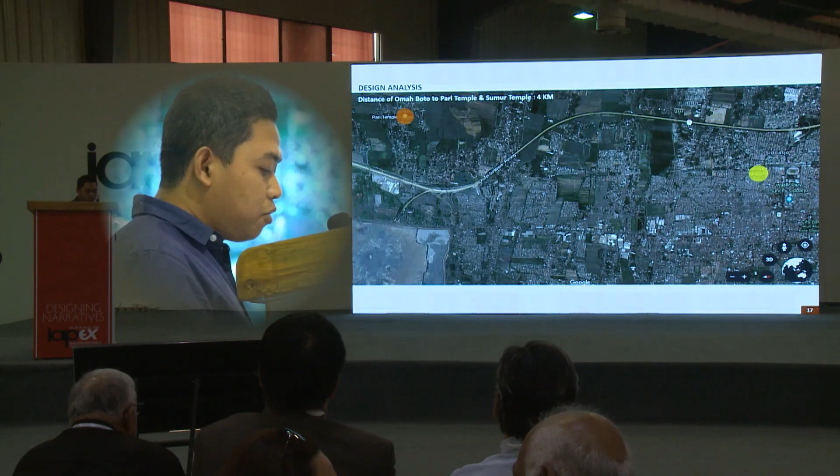Omah Boto is located in Sidoarjo, and in our analysis we found something interesting. The project location is close to Pari Temple and Sumur Temple, which have very interesting brick tectonics.

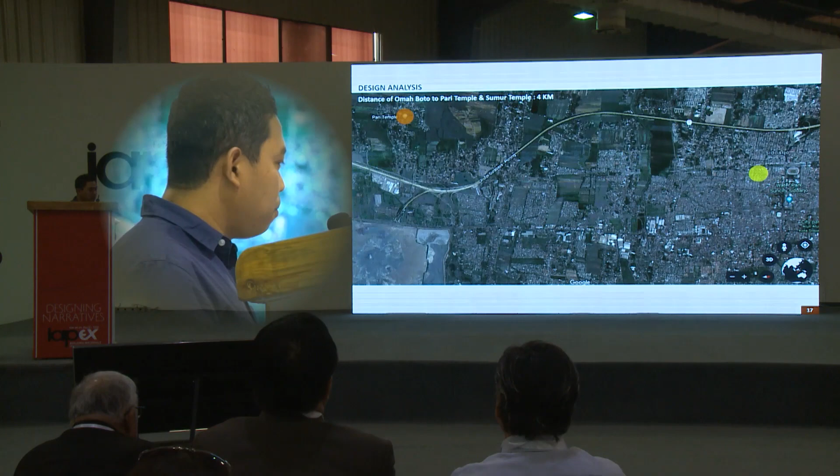These temples are located nearby and were built in the 14th century, about 4 kilometers from Omah Boto. This is Pari Temple and Sumur Temple, which were built 700 years ago.

Regarding this brick, we can see that Omah Boto, Pari Temple, Sumur Temple, and Trowulan are in line, just 20 kilometers from the site.

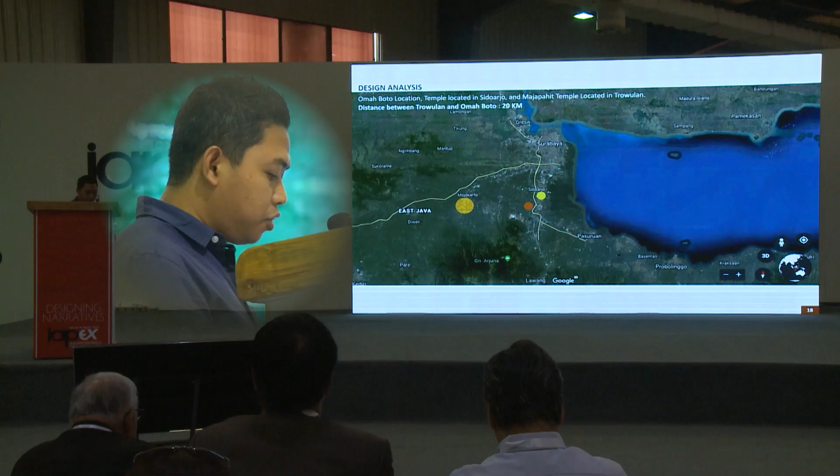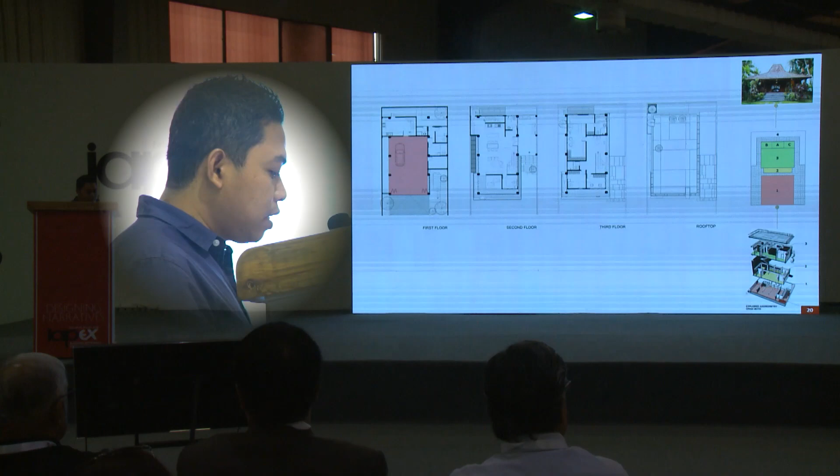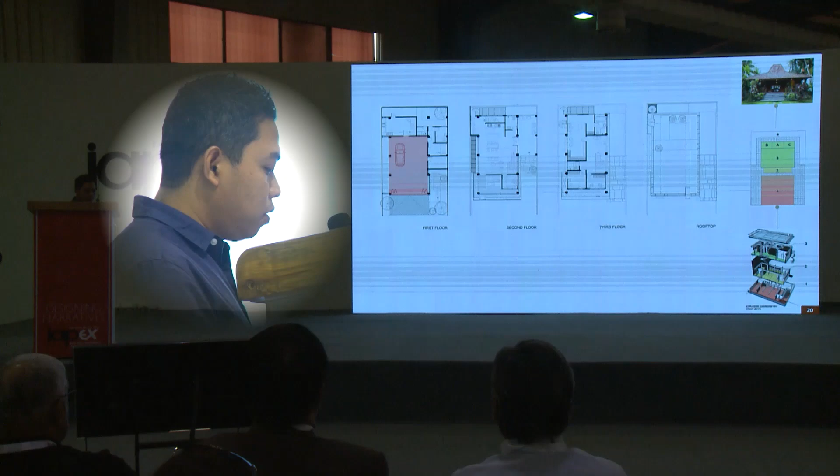We tried to vertically translate the connection between spaces, considering a wider communal space, more open and accessible from the lower level, followed by semi-private space on the second floor, and private rooms on the third floor. We know that sharing activity is the Javanese philosophy.

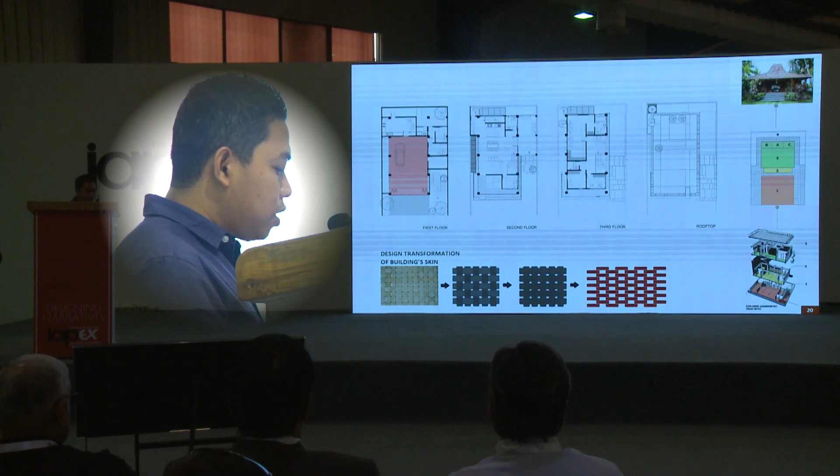This skin of the building was transformed from the Javanese house wall. It's called gedek, or woven bamboo, and we implemented it in brick.

This is the genesis of how Omah Boto was made. Local red brick becomes the DNA of the whole house.

The module of a brick determines all of the house elements' dimensions, even the doors, windows, height of space, fence, and others. This is the reason why it's called Omah Boto, or brick house.

We use MRH brick, this local brick named after the nickname of a machine brick producer's wife. The name is Mufaroka. So this MRH has a story too.

These are the 13 brick tectonics applied in Omah Boto, inspired by Pari Temple and Sumur Temple. This is the detailed drawing given to the craftsmen to help the arrangement process, how we communicate with them. They understand the picture easily by looking at the color code like this.

This is it, we give it the name decoding. And this is the result.

The tectonics concept and the craftsman's brilliance can bring architects' and clients' dreams come true. Exposed brick originality creates a new, unique view from each side of the wall, ceiling, and floor.

If we take a look at the key plan, this is where the 13 tectonics were applied in Omah Boto.

The uniqueness of the brick arrangement also embodies some of Indonesia's batik patterns. This is the owner's desire to make his house have a strong Indonesian character.

So we added all the elements to support the Javanese architecture's character. It is gebyok door, the Javanese carved wooden door, used as the main door of the house. It was able to let wind and light get into the house.

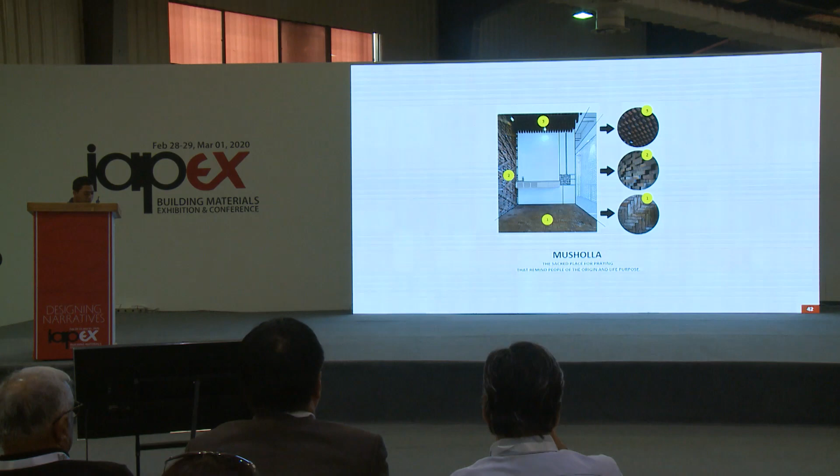The musola, or praying room, is a sacred and holy place. This room's concept reminds people of the origin of human creation by Allah. Human is created from soil, so is the brick. So the musola is surrounded by bricks in the floor, wall, and ceiling.

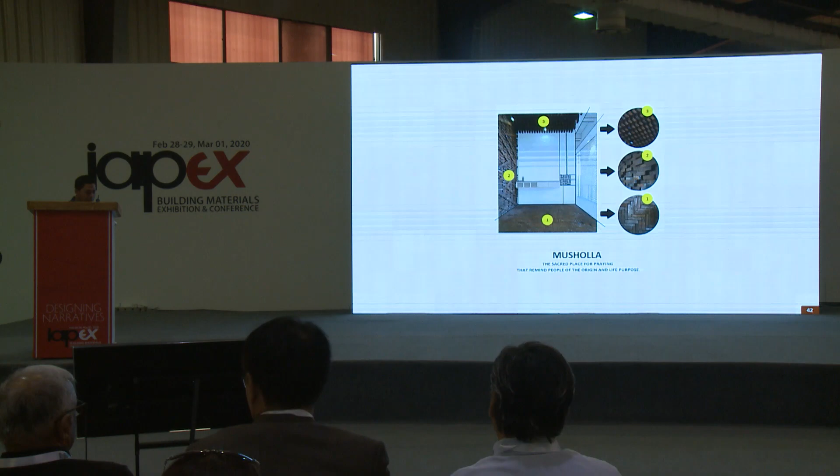When we kneel, we look at soil. When we sit tahiyat, we look at soil. And when we pray, we look at soil. It increases the reminder about our origin.

This is the application result. It reminds us back to the source of life. Our main life purpose is to serve God. The floor, wall, and ceiling in this room are made of bricks as representation of our origin.

This backdrop was made out of residual bricks, so none of it went to waste. From this building process, there were 10% brick waste, and that 10% was arranged into the tectonic design, and the result became the main point of view of this communal space. So this is the garage, but at other times it becomes a communal space.

After finishing the Omah Boto project, I tried to evaluate and contemplate myself, and this is my self-reflection. I realized that red brick has issues with destroying our earth in its making process, because it can damage the soil surface and causes carbon footprint. But from the deepest of my heart, I'm trying to preserve this type of brick that has existed since the 14th century, because if we don't preserve it, the local brick producers will disappear.

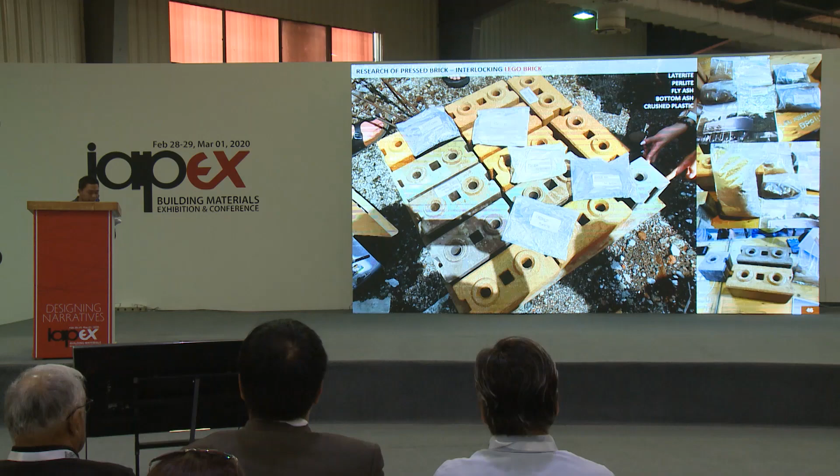Now, we don't just make bricks from laterite soil. We have collaborated with a brick company, my professor, and colleagues to do research and make pressed brick that uses waste material, such as perlite from air conditioner waste parts, fly ash and bottom ash, even crushed plastic and animal waste. This we call Lego brick, the interlocking system brick.

Why do we use the interlocking system? It was inspired by the interlocking systems we found in Indonesian stone temples, like Borobudur and Prambanan, and how they joined materials even without any adhesive. Now we can apply it to our new project, Al-Fatah Mosque in Sidoarjo, East Java, and we still use the ingenuity of craftsmanship.

This is the result. The craftsmen read the code drawing from the architect and learn a new thing, new material, new technique.

In this mosque building process, we always try to share and learn together with young architects and students. He is Golfa, an architecture student from Mali, Africa, who learned brickmaking here, and now he's trying to make his own brick using local materials in Mali.

Not only pressed brick, but also fan block. We use fan block, which is made of recycled materials without using a kiln system, just the press technique. Interestingly, these fan block producers always collect waste materials around the roof or ceramic industry and mill it into basic materials, helping save the environment.